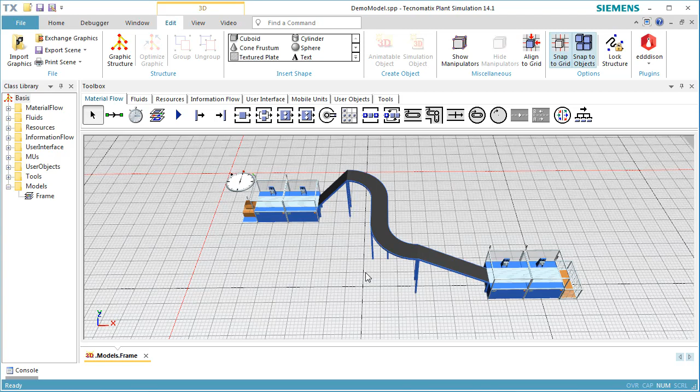First, we are going to hide the grid. Click the View tab and switch off the grid. Next, we are going to show the shadows of the objects. To do so, click Shadows.

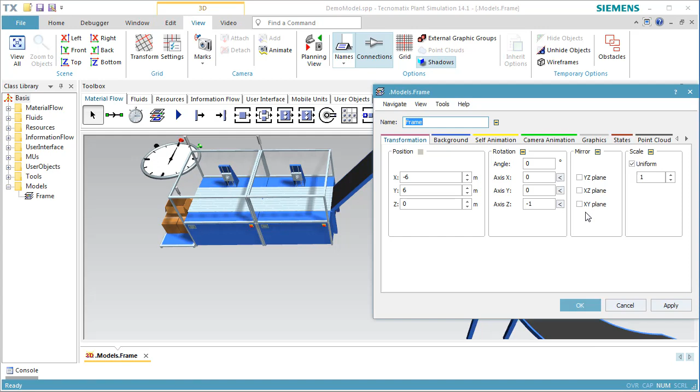Now we want to define the floor and the walls of our factory. For this, we first add a graphic group called Walls to our frame. Open the 3D Properties dialog of the frame and change to the tab Graphics. Click the button Add to add a new graphic group and enter the name Walls. Click OK to close the dialog and OK to close the dialog 3D Properties.

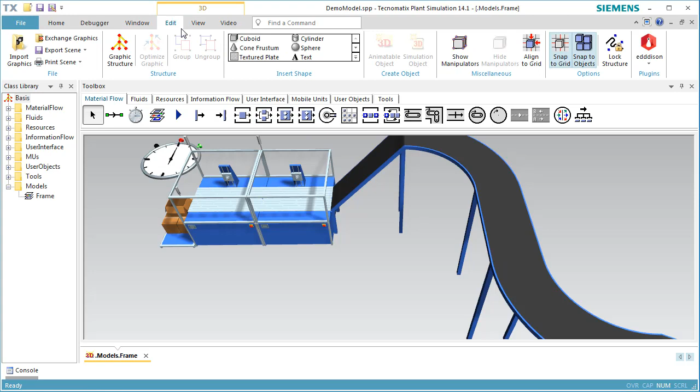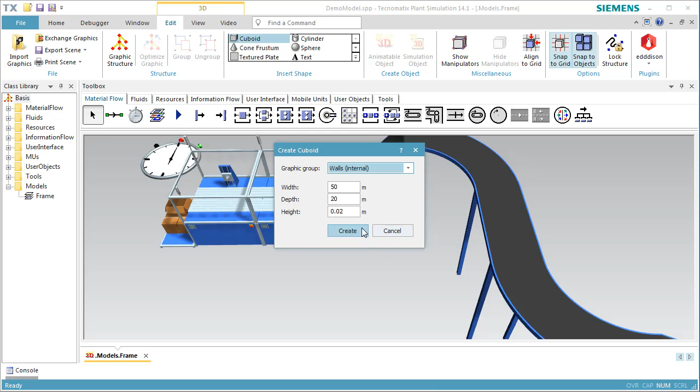First, we create the floor. To do so, we select Cuboid in the Insert Shape group of the Edit Ribbon tab. Enter 50 meters for the width of the cuboid, 20 meters for the depth. The floor should have a height of 0.02 meter. Select the graphic group Walls for this object. Position the floor so that it includes all material flow objects.

Now, we open the 3D Properties dialog and change to the tab Material. We activate the material and select one of the colors for the floor.

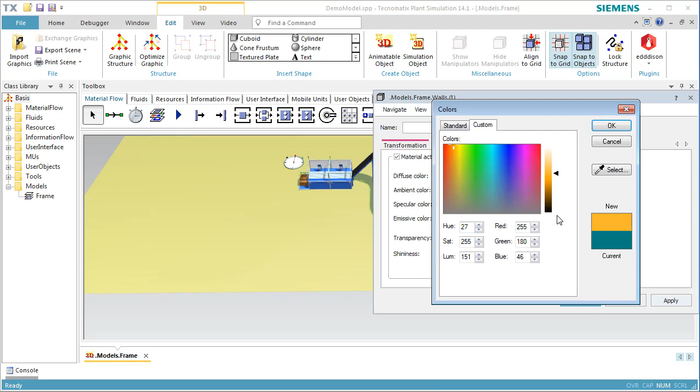Next, we are going to create the walls. To do so, we select Factory Walls from the Insert Shape group. We use the same values for the width and the depth. For the height, we keep the value of 5 meters. Make sure that the graphic group Walls is selected. Click Create and position the walls onto the floor.

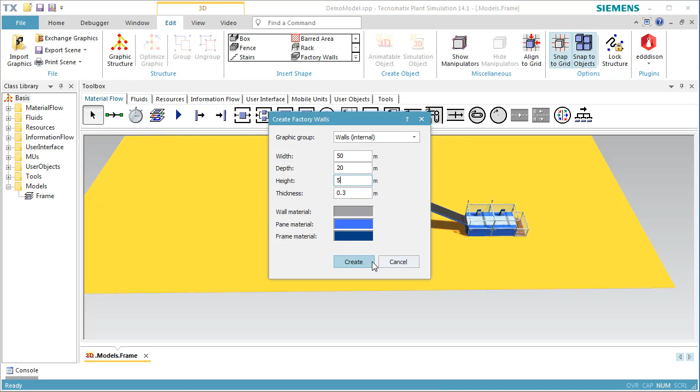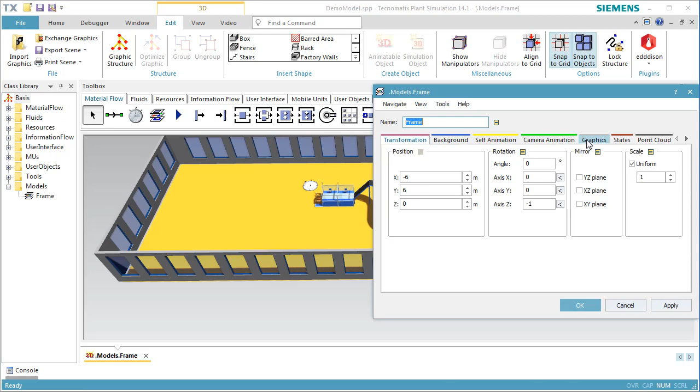We want to protect the graphics of the building against unintentional movement. To do so, we open the 3D Properties dialog of the frame and change to the tab Graphics. Select the checkbox Locked to lock the graphic group Walls.

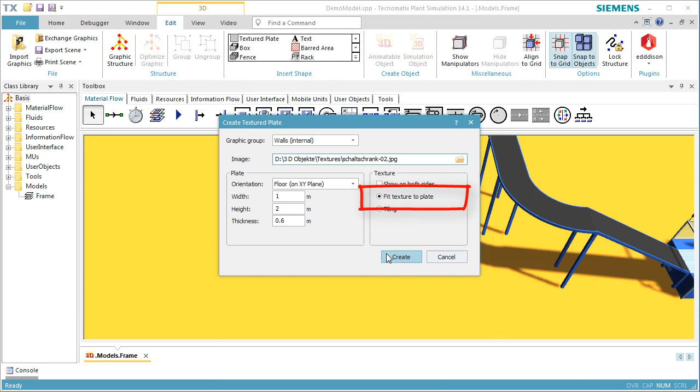In real life, factories usually have a number of electrical cabinets. To insert a cabinet, we click Edit on the Ribbon tab and select Textured Plate in the Insert Shape group. Enter 1 meter as the width, 2 meters as the height, and 0.6 meter as the thickness of the plate. We select the image of a real cabinet as the texture. Make sure that Fit Texture to Plate is activated. Click Create to create the cabinet.

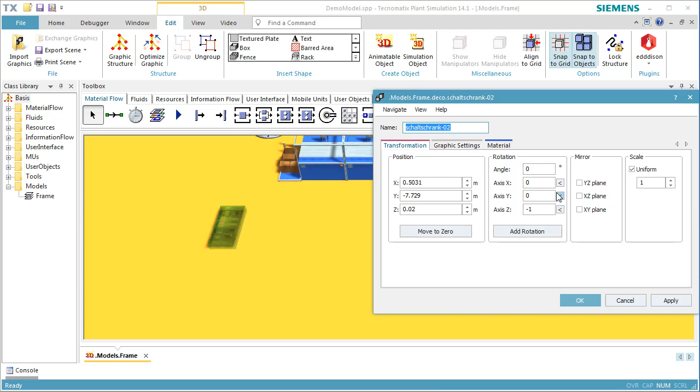We select the cabinet and open the dialog Edit 3D Properties by pressing Ctrl+3. Set the Z position to 1 meter and click OK. This inserts the cabinet into your factory.

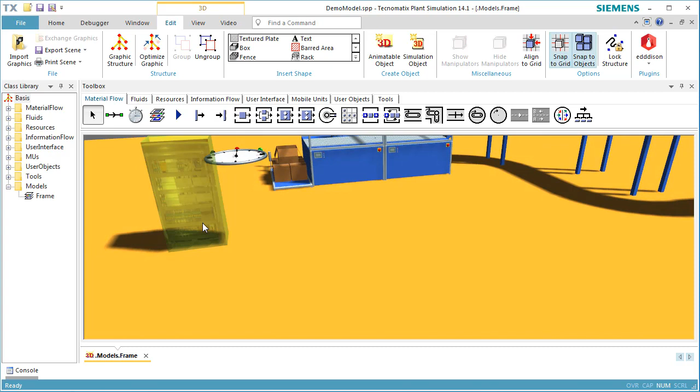Now we want to change the color of the cabinet. Select the cabinet, click the right mouse button, and select Show Graphic Structure. In the dialog, we see 2 graphic nodes under Deco. Selecting one of the graphic nodes also selects the corresponding graphic.

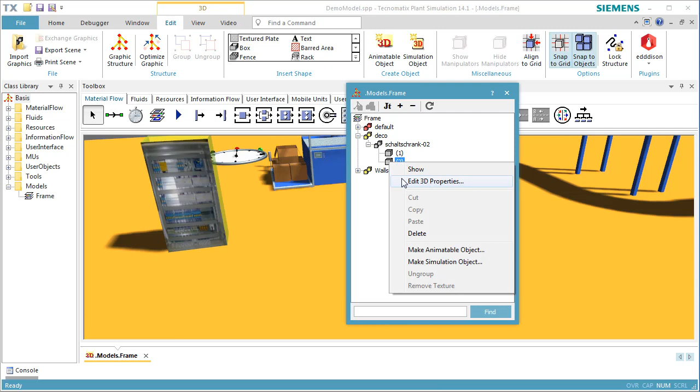We select the node of the cabinet. We click the right mouse button and select Edit 3D Properties. We click the tab Material in the dialog that opens. Activate the settings for the material. Click the drop-down list for the diffuse color and select one of the colors. Click OK to close the dialog, and then close the tree of the graphic.

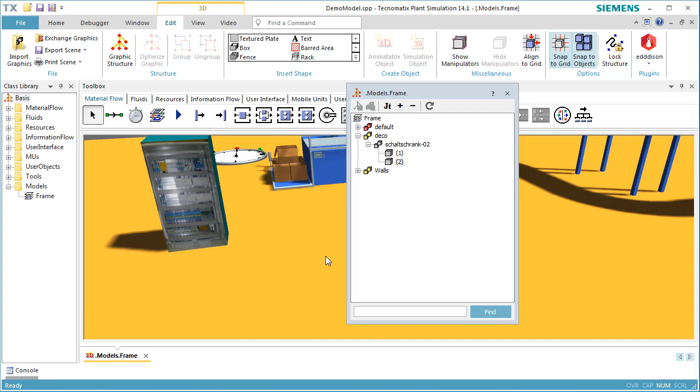Next, we want to insert a rack. To do so, we select Import Graphics on the Edit ribbon tab. Plant Simulation offers a list of graphics which you can use in your model. Select the file rack.jt. Insert the rack. Click OK in the dialog Insert Graphic.

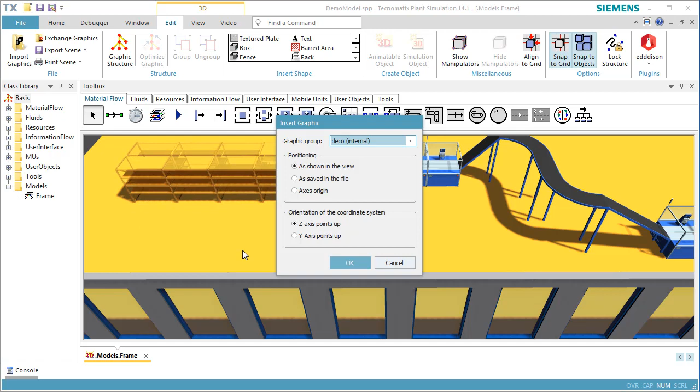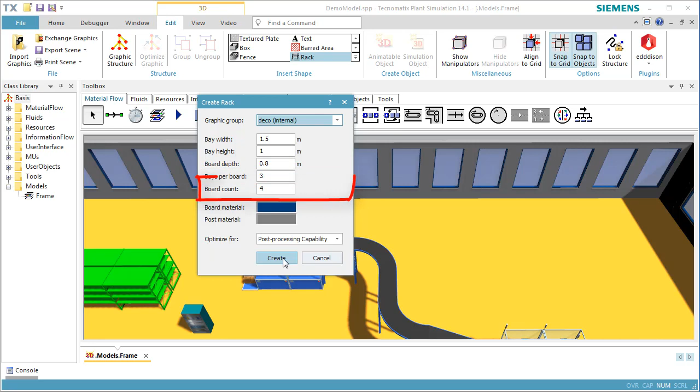You can import any graphic file of your liking. Plant Simulation supports various graphic formats. Instead of importing a graphic, you can also create a rack by clicking Rack in the Insert Shape group. We define the parameters in the dialog that opens. The first three parameters define the dimension of a storing box of the rack. Bays per board defines the number of columns of the rack, and board count defines the number of boards.

You can also select one of two different optimization strategies: post-processing capability or performance. Performance creates a flat structure of the rack with a lower number of graphic nodes. Post-processing capability enables you to modify each graphic element of the rack.

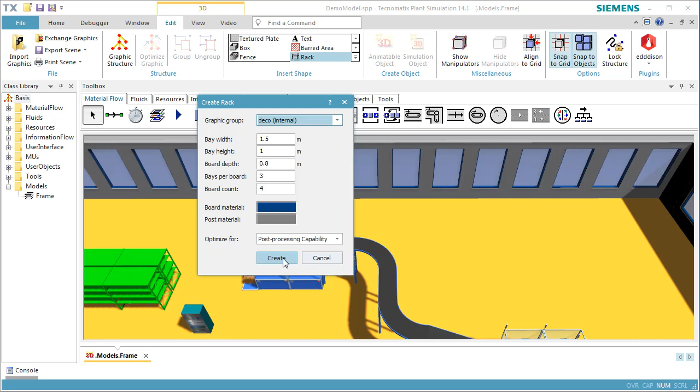If you have areas in your factory which the workers cannot cross, you can define barred areas. To do so, select Barred Area, then select the shape of the barred area, round or rectangular.

For a rectangular area, you can select if the area will be displayed with a hatched pattern. We selected Rectangular with Hatching. Click Create. This creates an area which the worker cannot cross.

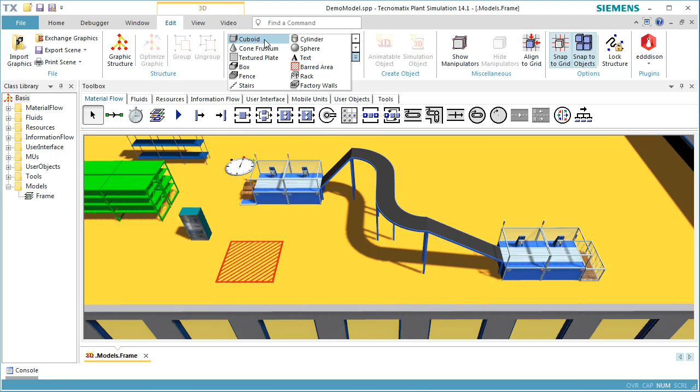Next, we want to create a platform on one side of our factory. First, we create a plate representing the floor of the platform. Select Cuboid in the Insert Shape group, and enter a length of 20 meters and a width of 7 meters. Click Create to create the plate.

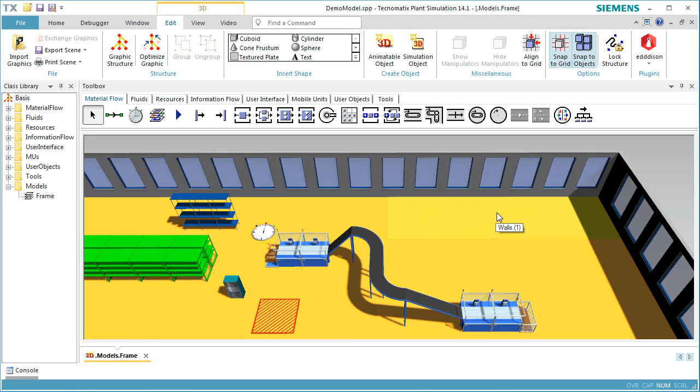Position the plate in the upper right corner of the factory. Click the right mouse button to open the Properties dialog of the plate, and enter 4 meters as the Z position, namely the height of the plate.

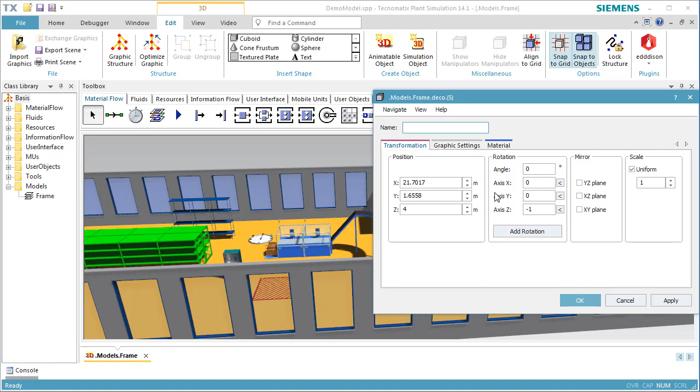To better distinguish the plate from the other graphic objects, let's define a material for it. We click the tab Material, activate the material, and select a color for the diffuse color. Click OK to apply your settings.

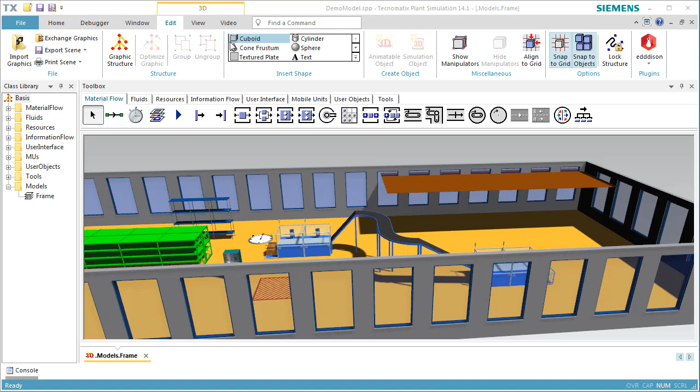Naturally, we are also going to need supporting pillars for the platform. We want the profile of the supports to be square. Therefore, we insert a cuboid with a dimension of 1 meter in all directions.

As we cannot change the graphic of the cuboid after we create it, we are going to create it with settings we choose and scale it later. Click Create to create the cuboid and place it anywhere under the platform.

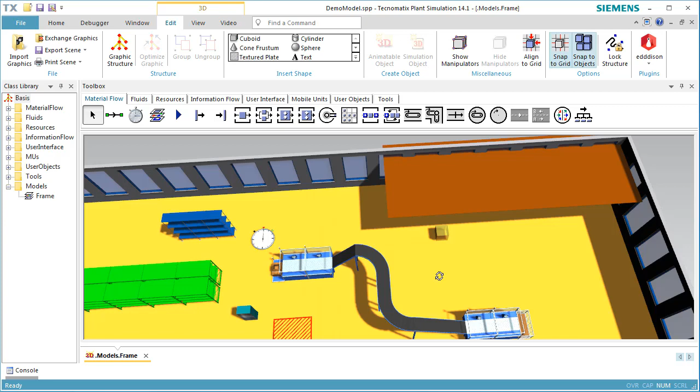We open the dialog Edit 3D Properties of the cuboid. Switch off Uniform Scaling. This allows us to define a different scaling factor for each of the 3 dimensions.

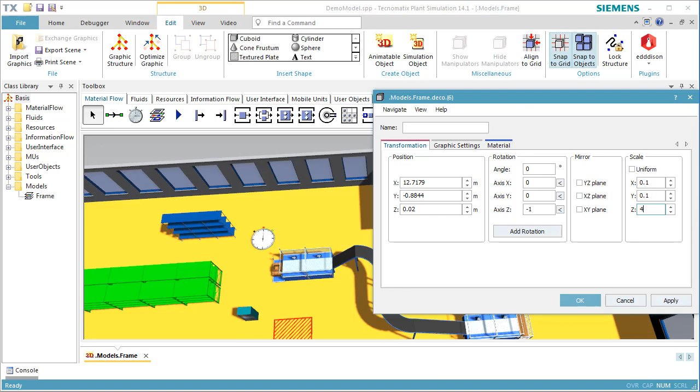We use a scaling factor of 0.1 for the X dimension and the Y dimension, and of 4 for the Z dimension. This corresponds to a width and to a depth of 0.1 meter and to a height of 4 meters.

As the worker cannot fly, we have to create a staircase, so that he can get onto the platform. We create a staircase that is 2 meters wide and rises to a height of 4 meters.

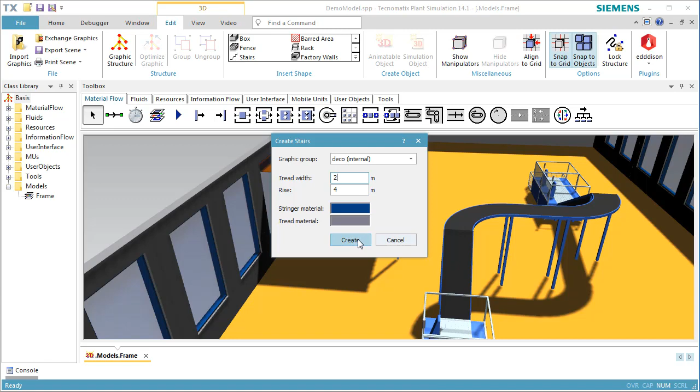Open the dialog Edit 3D Properties of the staircase and rotate it around the Z-axis by 90 degrees. We position the staircase so that it connects directly to the platform.

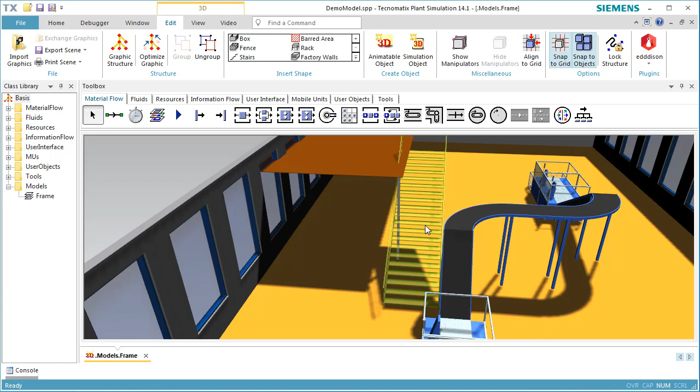You'll notice that this is not easy to do with the mouse. To exactly place the staircase, open the dialog Edit 3D Properties and enter the exact position. We might have to experiment a little until everything fits as it should.

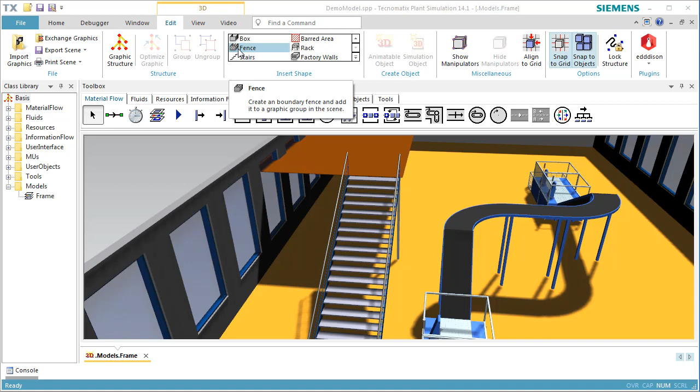For safety reasons, we also need a guardrail for the platform. We use a fence for this. Enter a length of 20 meters, a width of 7 meters, and a height of 1 meter.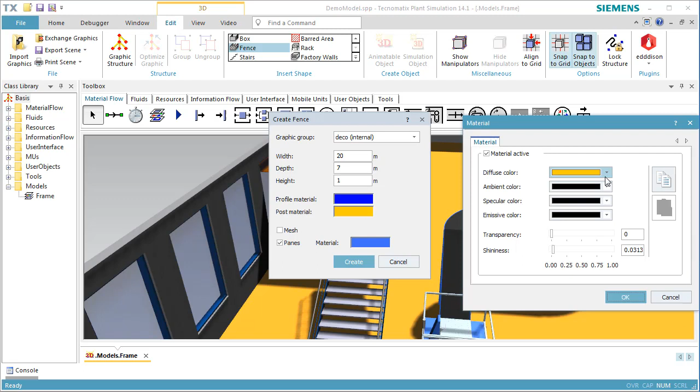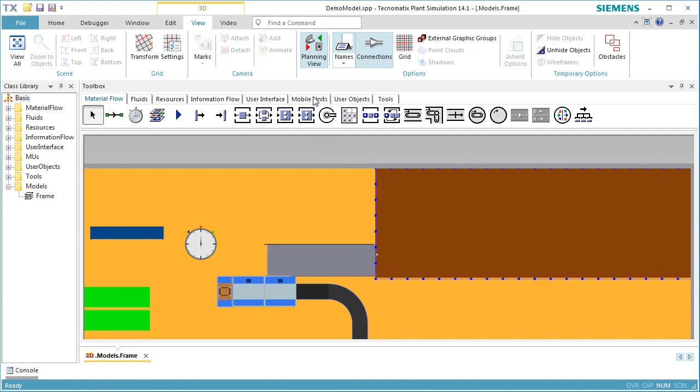You'll notice that our fence has 4 sides. We only need the front and the left side of the fence though. Select the fence and place the cursor over its right-hand side.

Press the plus key. This will drill down in the structure of the fence. Now only the right side of the fence is selected. Press the delete key on your keyboard to remove this side of the fence. Click OK to delete this part of the fence.

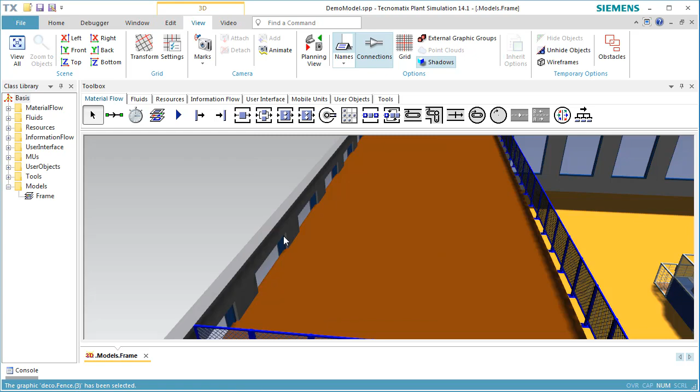Repeat this for the back of the fence and press the plus key until only its back is selected. Press the delete key to delete this part of the fence.

Finally, we have to delete the segment of the fence at which the staircase connects to the platform. We select the fence, press the plus key until only that segment of the fence is selected, then press the delete key to delete this segment.

In our last step, we have to remove the fence post that obstructs the way. We repeat the steps described above to delete it. Our finished guardrail for the platform looks like this.

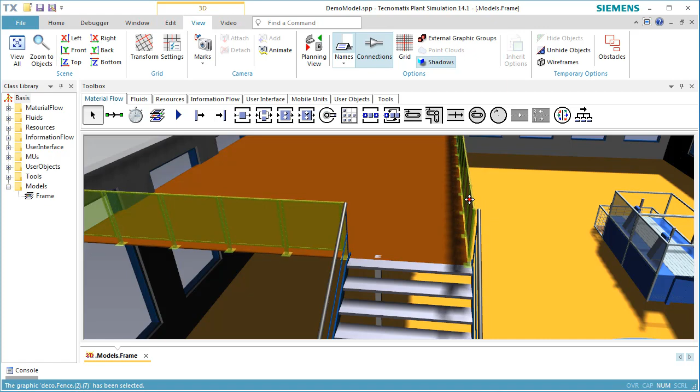This concludes our video about making our model in 3D visually pleasing.